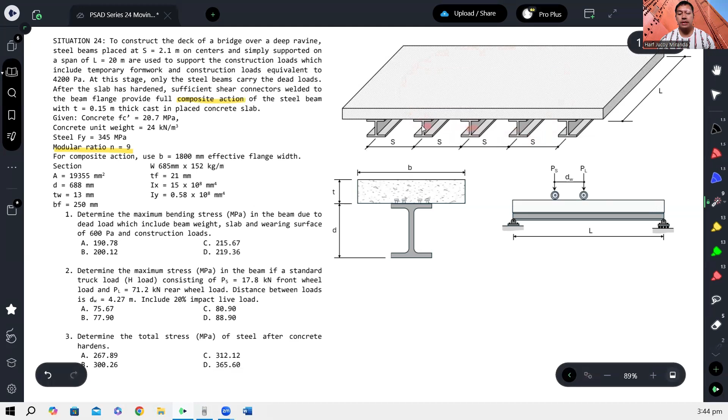Just to explain the figure, this is our isometric view. These are the steel beams referred to in the problem. Their spacing is 2.1 meters, so let's mark that: 2.1 meters here, here, and so on. And then our span is 20 meters.

Number 1: determine the maximum bending stress in the beam due to the dead load, which includes the beam weight, slab, and a wearing surface of 600 pascals, plus the construction loads. So basically we need to find the maximum moment in the steel beam due to the dead load.

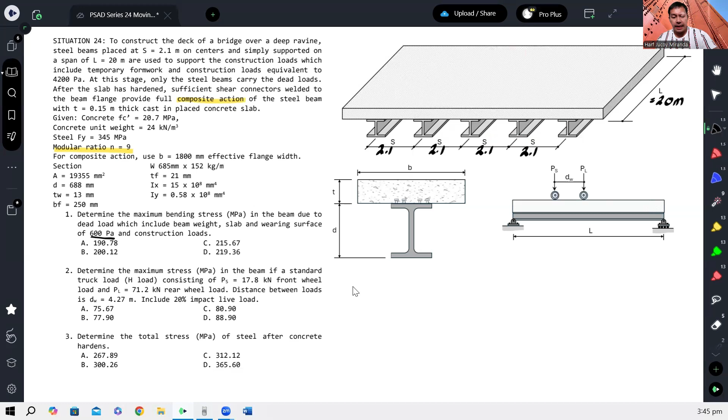So let's summarize all the dead loads. First, beam weight. The weight of the beam is given as 152 kilogram per meter. So we have the self-weight, which we'll call 152 kilogram.

Let's convert that to kilonewton per meter. Multiply by 9.81, divide by 1,000. So 152 times 9.81 over 1,000, and that gives us 1.49 kilonewton per meter. That is the beam self-weight.

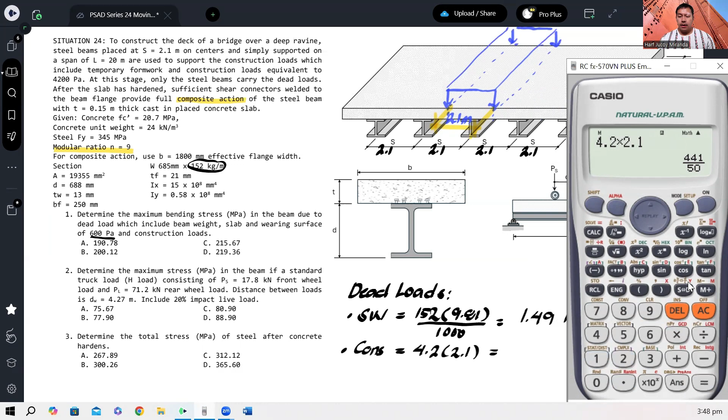So all the load there, with a tributary width equal to 2.1 meters. To convert the construction load from pressure into kilonewton per meter, we just multiply it by the 2.1 tributary width. So 4.2 times 2.1 gives us 8.82 kilonewton per meter. What else?

There's also the wearing surface given in the problem. Same idea, it's in pascal, so to convert to kilonewton per meter, first convert to kilopascal: 0.6 kilopascal, then multiply by the tributary width of 2.1. That gives us 1.26 kilonewton per meter.

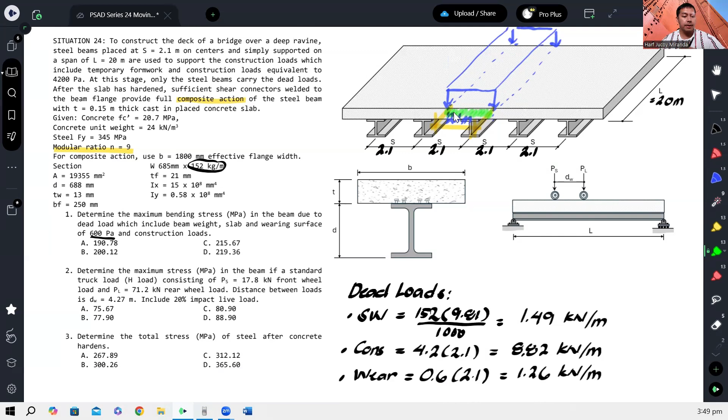Finally, don't forget the slab, our concrete slab. Of course there's also the weight of this slab. As we can see, we're given the unit weight of concrete, so to convert that to kilonewton per meter, we just multiply it by the cross-sectional area of the concrete. That cross-sectional area has a width of 2.1 meters and a thickness of 0.15, as stated in the problem, giving us kilonewton per meter.

So that is 24 times 2.1 times 0.15, which gives us 7.56.

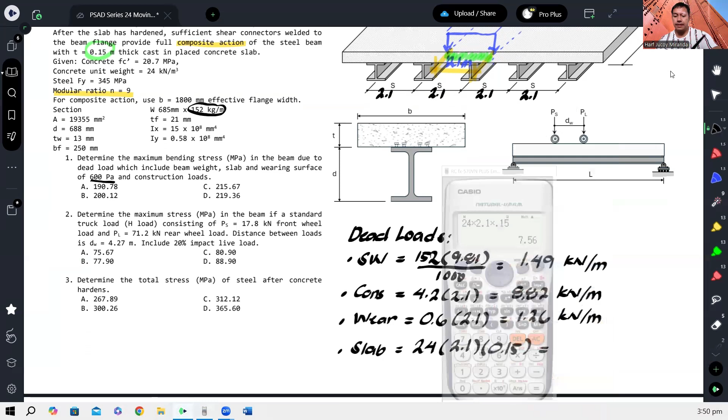Okay, and I think that's all, no? Importante lang, wala tayong makalimutan dito. So sinabi niya, beam weight, okay na. Slab, okay na. Wearing surface, okay na. Pati yung construction load, ito rin. Ito naman yun. Okay na lang.

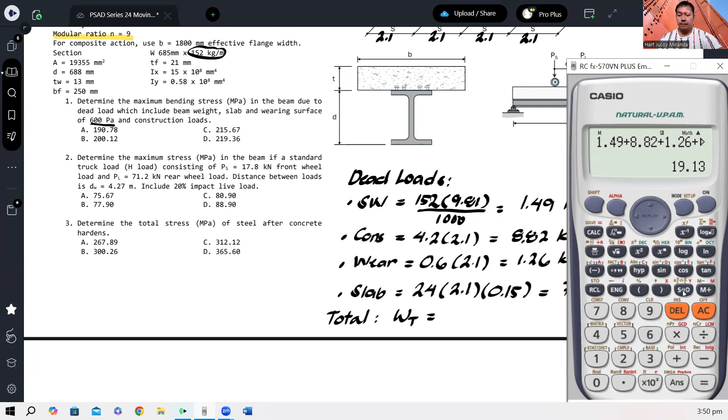So, ibig sabihin, yung total dead load natin, tawagin ko na W sub T, total. So, i-add lang natin yan lahat: 1.49 plus 8.82 plus 1.26 plus 7.56. And that should give us 19.13 kilonewton per meter.

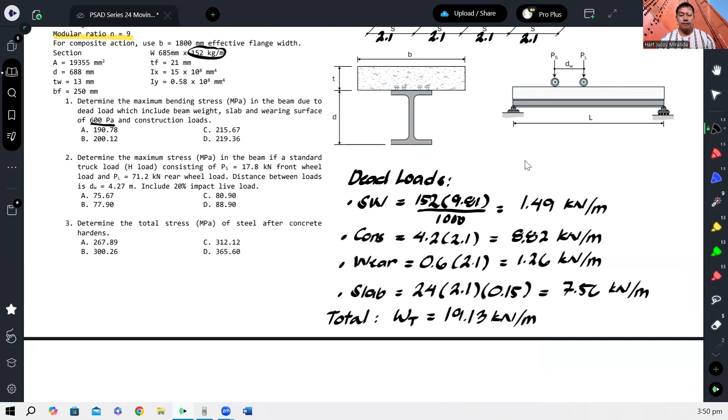Okay? So, therefore, now that we have the load, parang ang lalabas na ngayon, para lang siyang simply supported beam, no? So, this is for number 1.

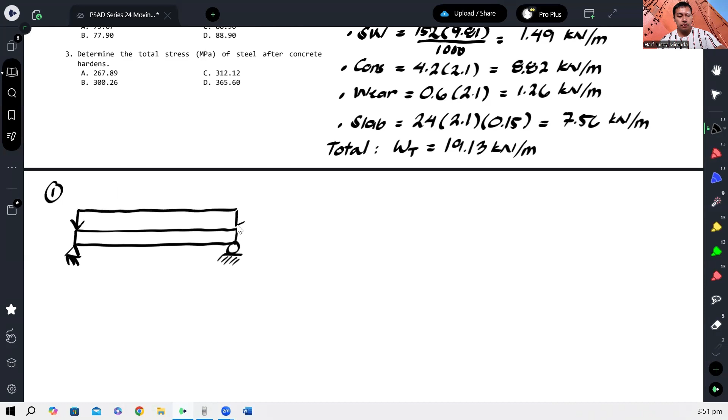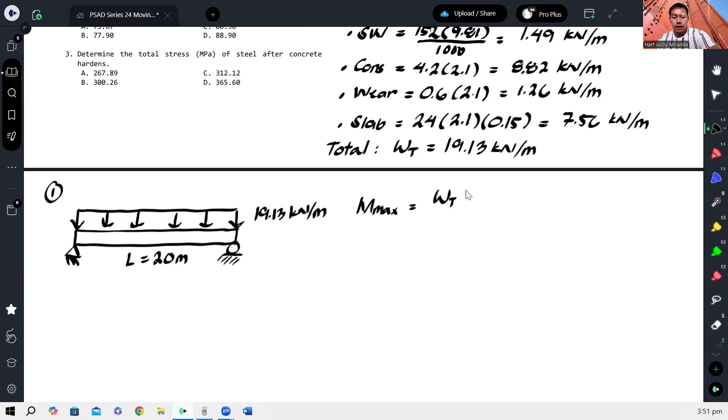Para lang siyang simply supported beam, okay, na subject to a uniform load equal to the calculated, which is 19.13 kilonewton per meter. And therefore, ang maximum moment na mapoproduce dyan, which is at the midspan, would simply be equal to W L squared over 8.

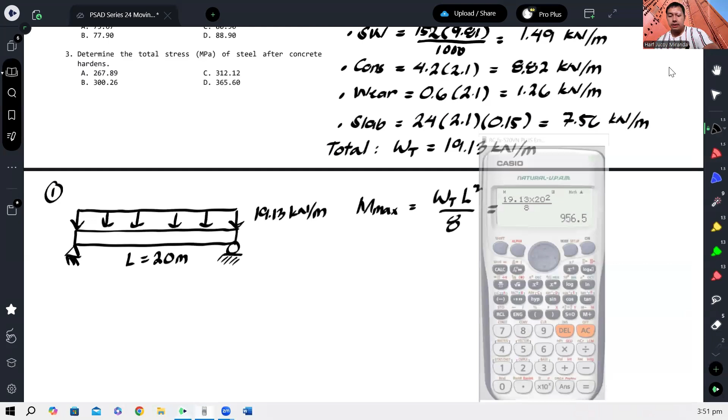Okay, at pwede na natin actually makompute. So that's 19.13 times 20 squared over 8. And that gives us 956.5 kilonewton meters. Okay? And dahil meron na tayo noon, we can now calculate the maximum bending stress.

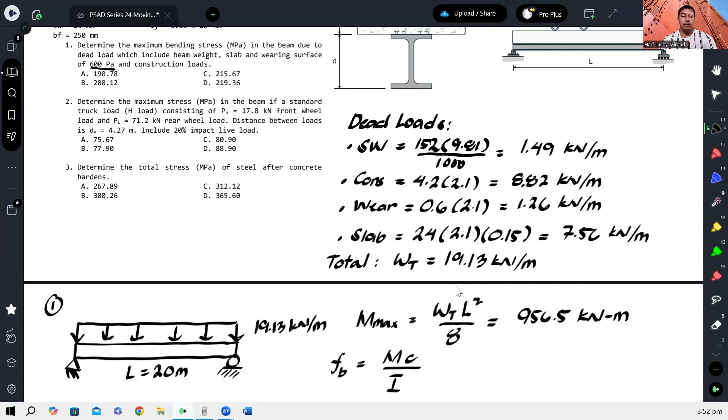And that is just MC over I. Okay? At dahil dito sa number 1, wala pang composite action na mangyayari kasi ibig sabihin dito hindi pa fully cured yung concrete, no? So yung bakal lang natin yung magdadala ng load na yon. So ang gagamitin lang muna natin na moment of inertia would be yung moment of inertia nung bakal o nung steel cross section nung structural steel, na kung saan equal sa 15 times 10 to the 8, which is yun yung moment of inertia about the x-axis.

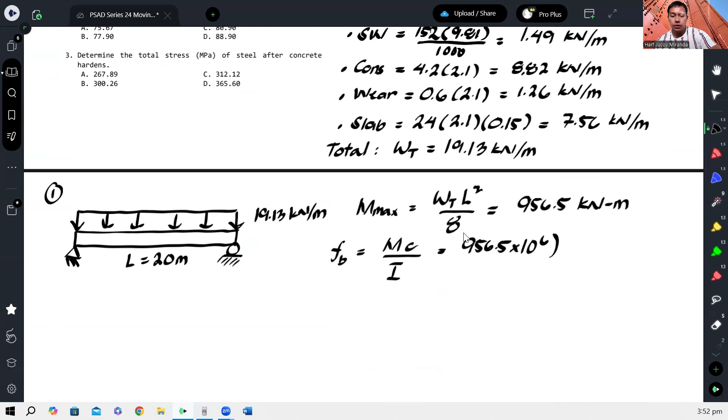So we have 956.5 times 10 to the 6, gawin natin Newton millimeter. Tapos yung C natin, so di ba ang cross-section natin dyan ay ganito. Ayan, so ito yung x-axis, na lumalabas, yan na rin yung neutral axis natin for this case.

So, as we can see, yung C natin is yung distance natin from the extreme fiber. And actually, pantay lang naman yan kasi doubly symmetric naman tong natin, I shape. So, ibig sabihin, kung ang total depth nito ay 688 as given in the problem, yung C natin bali would be kalahati nun, which is 344. Okay? So, 344 over the moment of inertia about the x-axis, which is 15 times 10 to the 8.

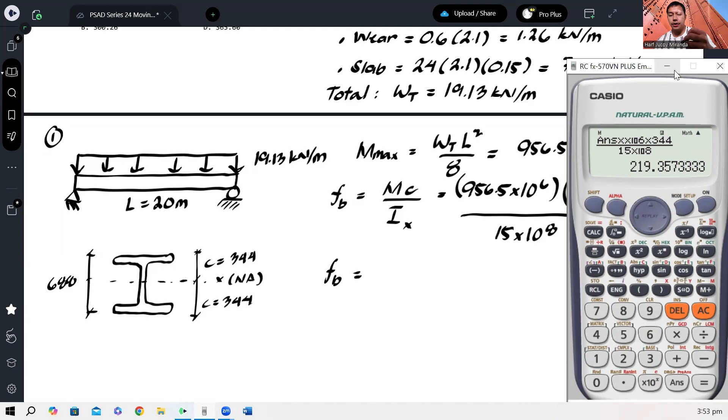Okay, and our maximum bending stress due to dead load. Okay, this gives us 219.36 megapascals. Okay, and that will be our answer for number 1.

Okay, next, determine the maximum stress in the beam if a standard truck load, highway load, consisting of PS equals 17.8 kilonewton front wheel load and PL equals 71.2 kilonewton rear wheel load. Distance between loads is 4.27 meters, include 20% impact live load.

Okay, so pinapahanap naman yung maximum stress. So dito, kailangan tandaan natin na kapag ka meron kang moving load, in order for you to produce the maximum moment, kailangan daw, ito ay pang dalawang wheel ha, kailangan daw yung gitna ng beam, yung gitna ng beam o yung center line ng beam ay papagitnaan nung maximum na wheel load at yung resultant ng mga wheel, no?

So what do I mean pagdating sa drawing? Drawing natin. So ganito daw mapoproduce yung maximum moment natin. Okay, so kunyari ito yung gitna. No, yan yung center line natin.

So kailangan, ito yung requirement ha, kailangan yung pinakamabigat na wheel, ito yun, larger PL. Tapos yung resultant ng mga load, tawagin ko na lang na R, ay kailangan daw equidistant doon sa center line. So kung ito ay X, ito rin ay X. Tapos kunwari nandito somewhere yung smaller na load. Ganyan, no? Yan yung itsura. Ganyan dapat yung tandaan natin. Tapos dito natin matatagpuan yung maximum moment.

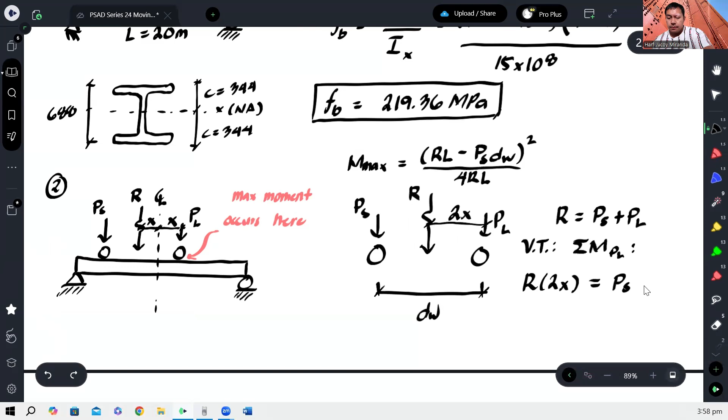So when we apply Varignon's theorem, let's take moment about the larger load. The total, which is R, times 2x, would be equal to the smaller force times the distance of the wheels. This gives us x equal to the smaller load times the distance of the wheels, over the resultant R.

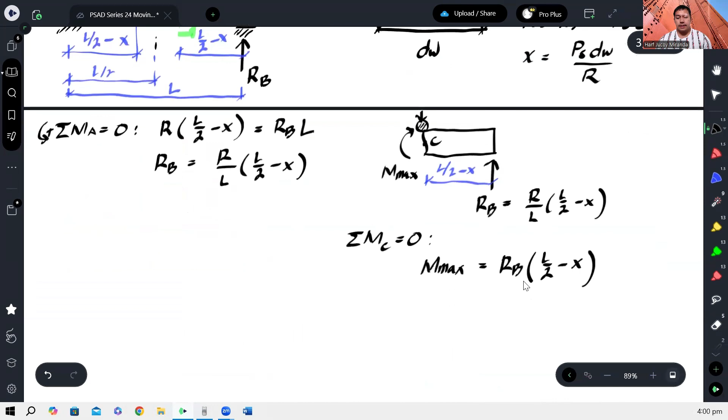In case I forget this formula, let's just show if this is really the formula. RB is R over L times L over 2 minus X, then let's multiply this by L over 2 minus X again. As you can see, we can simplify. Let's continue here. So M maximum can be rewritten as R over L times, L over 2 minus X, squared.

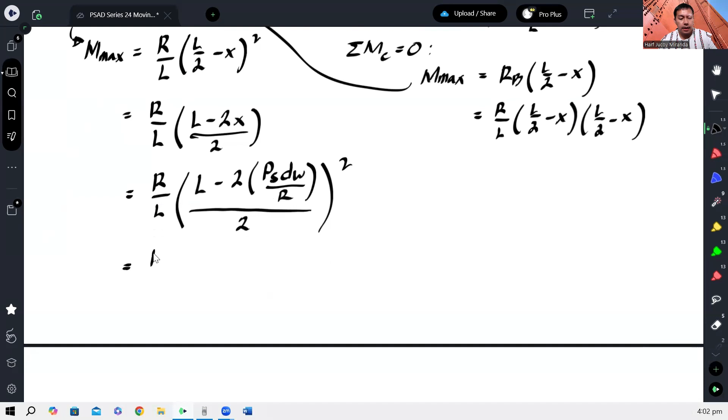Okay, and since there's a denominator with R, let's get a common denominator. So it becomes R over L times, RL minus 2 PS DW, over 2R.

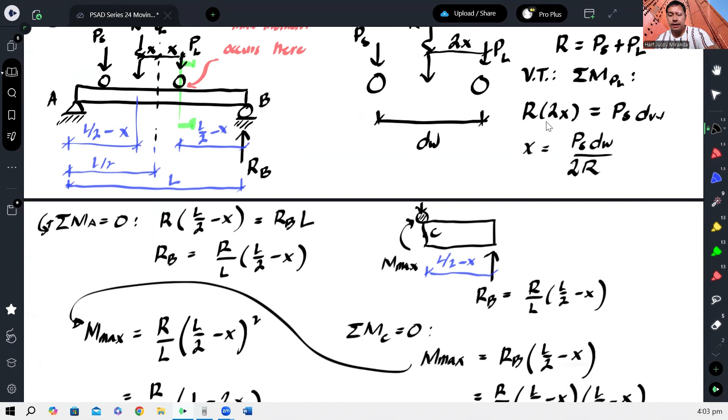Okay, ayan. So naka-square ito lahat. Kapag sinimplify pa natin yan, magiging R over L. Itong nasa numerator side, iiwan na lang natin as naka-square. Yung denominator side, 2r squared is just 4r squared. So magka-cancel yung isang r, sasama dun yung L, kaya ang lalabas dito, yung maximum moment natin is RL minus PSDW squared over 4RL, which is ito rin yung kanina natin na sinulat. Okay, ito rin yun, no? Okay, so that's how we derive it.

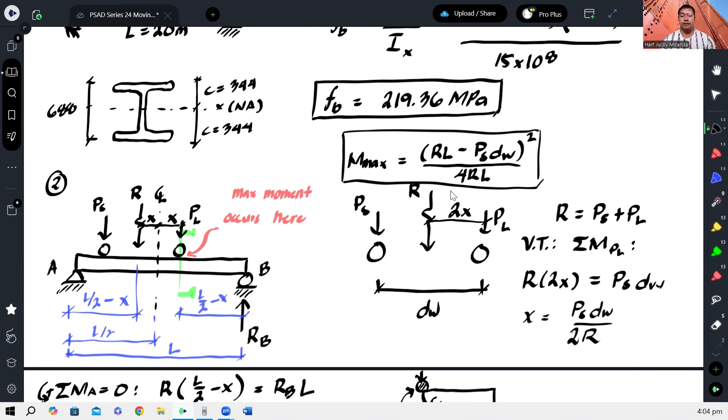Pero kung gusto ninyo kabisaduhin, pwede naman. Mas madali kung kabisado. So anyway, kung gagamitin natin ito, so we can now calculate the maximum moment.

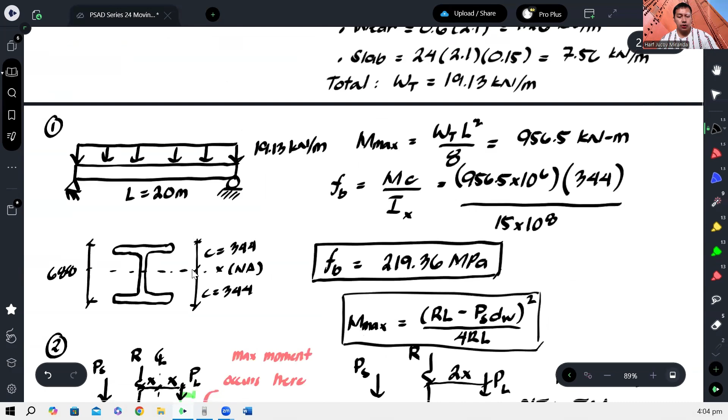So sa problem, binigyan tayo na yung PL ay 71.2. Tapos yung P smaller is 17.8. Tapos yung distance ng mga wheels ay 4.27. Ayan, so we'll just apply them.

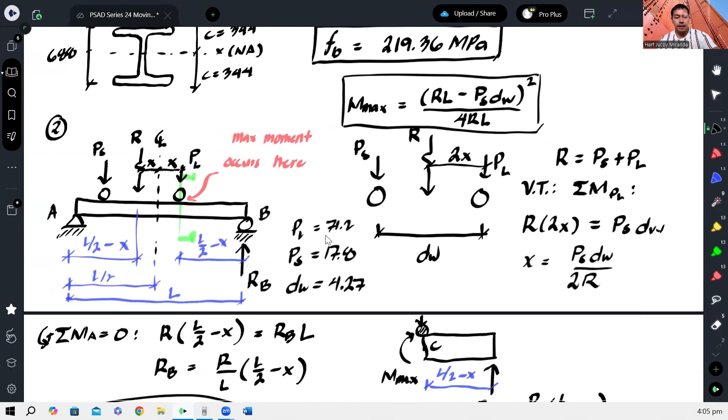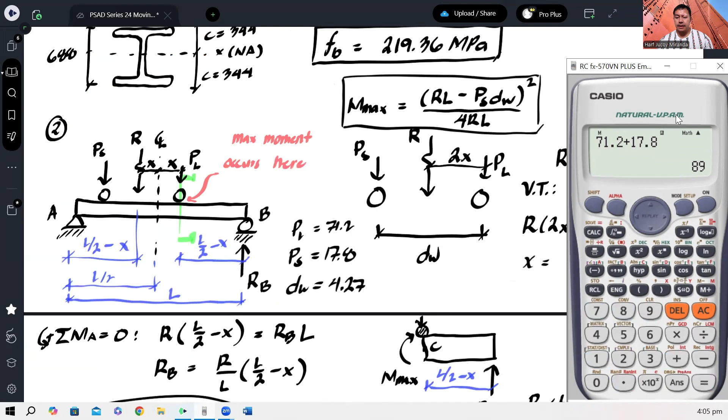So lumalabas yan kapag itong dalawa, so we can calculate for the R dito na lang sa baba. Yung R ay P smaller plus P larger. That would give us 71.2, tama ba? Plus 17.8, so that gives us 89 kilonewtons.

Okay, so if we would use that formula, magiging 89 times yung L natin 20 minus yung smaller na wheel load, 17.8 times yung distance between them is 4.27, naka-square over 4RL. Okay, and that gives us our maximum moment, 407.81 kilonewton meters. Okay, and now that we have that, we can now calculate our moment of inertia.

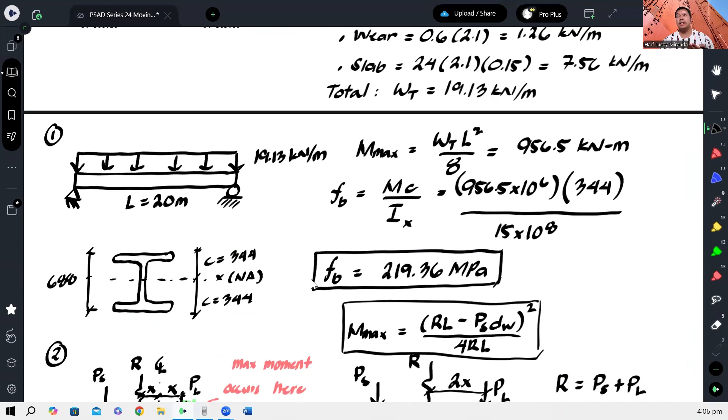I mean, our bending stress. However, we still need to calculate for our moment of inertia.

Sa number 2 kasi, although wala siyang binanggit specifically, dahil meron nang dumaan na sasakyan, it is logical to assume or to conclude na nag-cure na yung concrete. Diba? Hindi naman magpapadaan yung sasakyan kung hindi pa nag-cure yung concrete. At dahil nag-cure na yung concrete, i-consider na natin dito ngayon yung composite action.

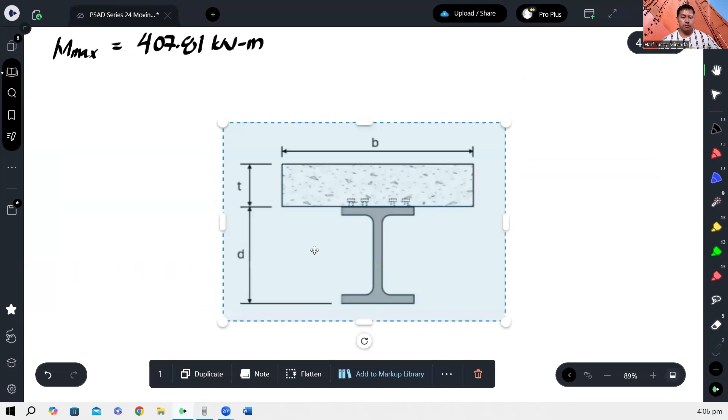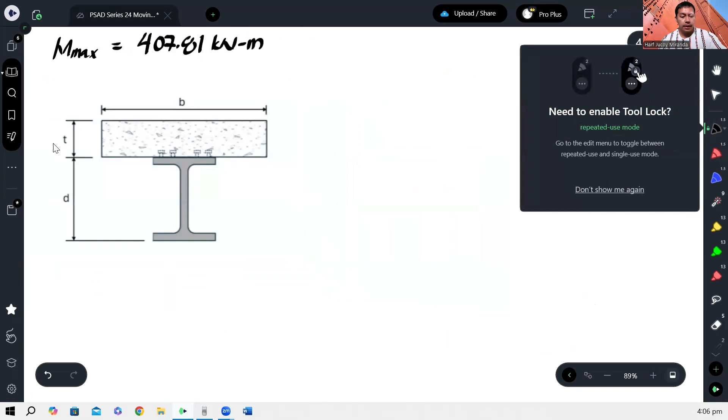Okay, so ibig sabihin, meron tayo ngayong section na kung saan magkatulong itong dalawa. Lagyan natin ng dimensions. Ito ay 150 mm, ito ay 688. Tapos ito naman yung sinasabi niya na effective flange width na 1,800. Kaya lang, ito, concrete.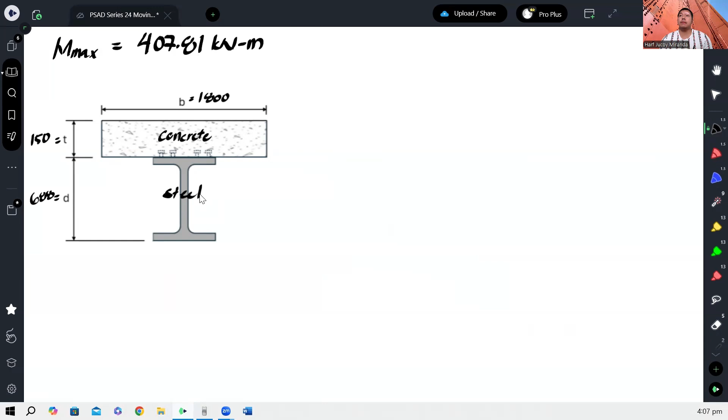Ito, steel. Alam naman natin na yung formula na MC over I, yung bending stress formula, ang isa sa mga assumptions sa derivation nun is kailangan yung material mo homogeneous. Or ibig sabihin, yung material mo iisa lang. So ano ang gagawin para maging mapag-isa itong dalawang magkaibang materials na to?

So dito ngayon papasok yung tinatawag natin na transform section. Ita-transform natin siya to single material. Okay, so paano yon? So ganito yan.

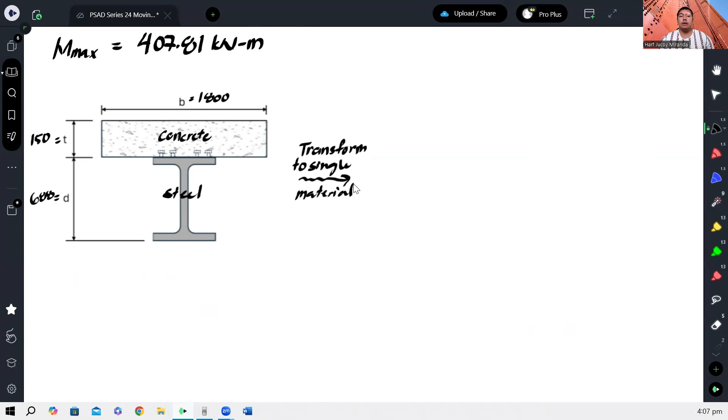You can choose if you want to convert everything in concrete or you can also convert everything into steel. Now depende yan sa case, depende sa kung ano yung mas madali. Um, to convert, yung modular ratio natin, ito na lang siguro. Konting background lang. Yung modular ratio, ano yan eh? Modulus of elasticity nung stronger na material sa modulus of elasticity nung weaker na material. Palagi yon. Kaya nga yung modular ratio natin laging mas malaki sa 1.

Ngayon, kung iisipin natin, how does it reflect in terms of the geometry? No? So tingnan natin. Diba, yung modular ratio, I mean yung modulus of elasticity, ano yan? Slope yan ng stress strain curve, diba? So nasa y-axis yung stress, nasa x-axis yung strain. So ibig sabihin, ito yung stress divided by strain.

Okay, so ibig sabihin, kapag sinubshoot natin ito dito, mangyayari, this would be stress over strain nung strong material over, ito naman yung stress over strain nung weaker material.

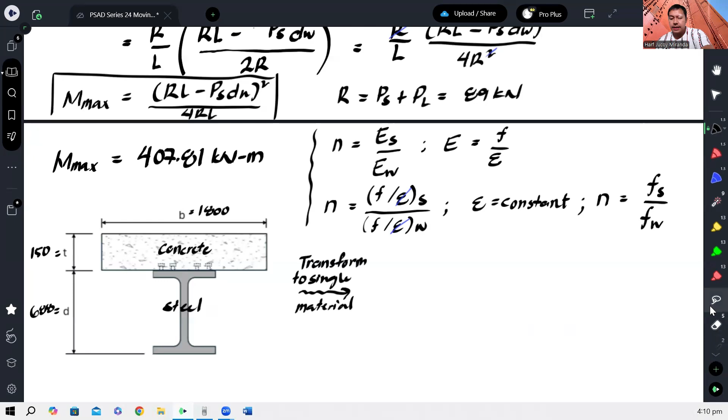We also need to identify that, hindi ba, yung nasa taas, pag sinabi mong stress, equal lang yun sa force divided by area? So ibig sabihin, mula dito, we can also write na yung modular ratio is force divided by area nung stronger material over force divided by area nung weaker material.

Tapos dito naman, kung meron kang material na kahit magkaiba pa yan, pag meron kang in-apply na force dyan, kailangan hindi magbabago. So dito naman, kailangan yung force natin must be constant. So ibig sabihin, this will cancel out.

And we are left with modular ratio equal to 1 over area ng strong over 1 over area ng weak, or that is also equal to the area of the weak divided by area of the strong. Okay? So yan ngayon yung mga relationship natin. So how do I use that?

So bali bilugan ko ha, ito, tsaka to. So how do I use those? Specifically speaking, sa problem na to, ang gagamitin natin dito is itong geometry, itong green, na kung saan sinasabi niyan, dito na lang natin ilagay, sinasabi niya na yung ratio ng area ng weaker sa area ng stronger ay equal lang din sa modular ratio.

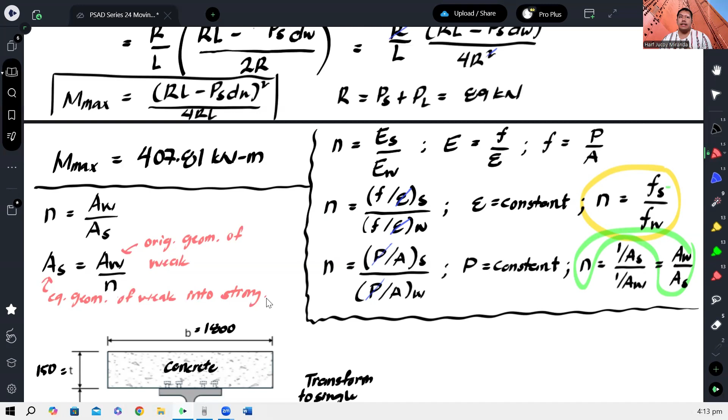of a strong material, no, ibahin natin. Para malaman ko kung ano yung equivalent size netong mahinang material na to kapag kinonvert ko siya sa matibay na material, kailangan lumiit siya. Kumbaga, ang equivalent niya na size doon sa stronger material mas maliit. Bakit mas maliit? Kasi originally mas mahina siya. So ibig sabihin, kung magiging malakas siya na material, kailangan paliitin mo yung area para makuha mo yung same capacity. Okay? So hopefully that makes sense.

Kaya ito yung pinapakita nito. Ibig sabihin, para maging strong material yung weak material, i-divide mo ng modular ratio yung area niya. And vice versa, kung halimbawa naman na yung strong material gusto mong gawing weak material, na gusto mong pahinain, kailangan mo naman i-multiply ito. Kailangan mo naman siyang i-multiply para makuha mo yung equivalent na weak material niya. So ibig sabihin, yung originally matibay na material, para maging mahinang material siya, kailangan lumaki siya. Para maging yung capacity niya ay same pa din.

Okay, I hope that makes sense. But anyway, in short, dito, yung concrete, kung gusto kong gawing steel, kailangan kong i-divide yung area ng modular ratio. Tapos yung steel, kung gusto kong maging concrete siya, kailangan ko naman siya i-multiply ng modular ratio. Kaya nga sabi ko kanina, mamimili ka lang kung anong gusto mo. So dito, mas convenient, based on experience, na yung concrete na lang yung gagawin nating steel.

So ibig sabihin, yung mahinang concrete para maging steel, i-divide natin ng modular ratio yung isa sa mga dimension niya. Take note, isa lang sa mga dimension ha, hindi yung dalawa, kasi isang n lang yan. Kasi 'di ba kung halimbawa na ito ay base times height divided by n.

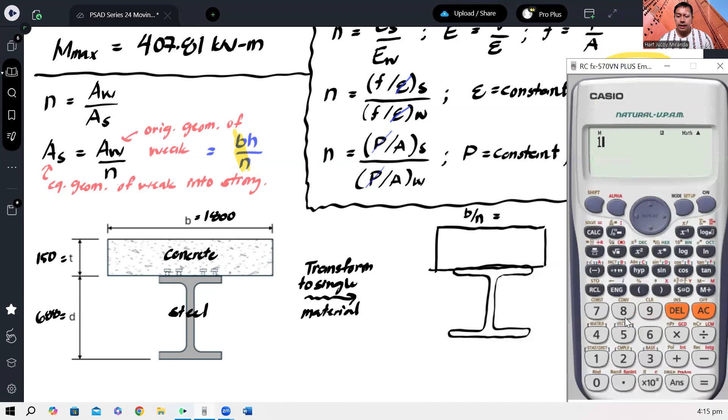Ayan, okay? So yung transform section niyan, magiging ganito ang itsura. Walang magbabago sa steel cross-section dahil hindi natin siya i-convert. Ang i-convert natin bali is yung concrete section. Ayan, so as you can see, liliit na to, kasi magiging ano na to, B divided by N. So ano yun? 1,800 divided by modular ratio na 9, which is 200.

Okay, tapos ito, 150 pa rin, walang magbabago. Tapos ito, 680 pa rin. So ito na ngayon yung equivalent steel nung concrete. Okay, ibig sabihin, steel na lahat to, steel na sila lahat. Yun yung idea, na para maging isang section lang siya, or isang klaseng material lang siya.

So of course, because same material na sila, pwede na natin hanapin ngayon kung nasaan yung neutral axis niyan. So bali, mag-Varignon's theorem tayo. Dito na lang ako sa baba magrerefer. So we will apply Varignon's theorem

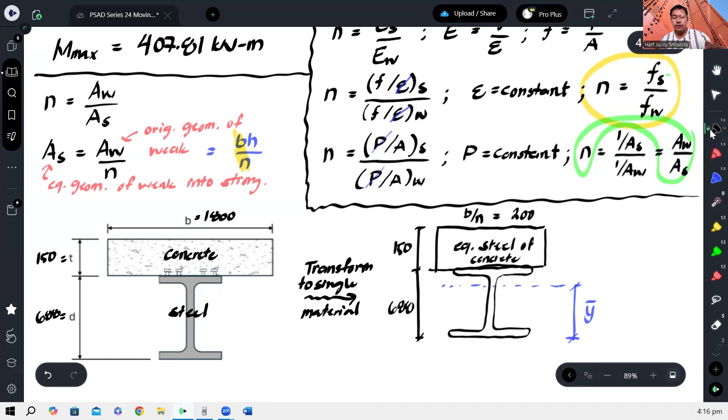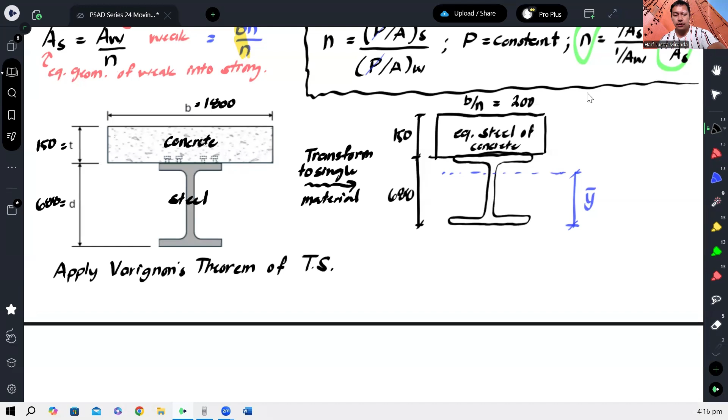on the transform section. So ito yung transform section natin. So summation ng moment sa bottom tayo, moment of area sa bottom. So yung total area, tawagin ko na lang ito na area 1, ito tawagin natin na area 2.

So yung total area, which is area 1 plus area 2, times y bar, would be equal to area 1, ang moment arm nun from the bottom ay 680 plus 150 over 2, plus yung area 2, which is yung steel, ang moment arm nun is just 680 over 2. So from here, we should be able to calculate for y bar.

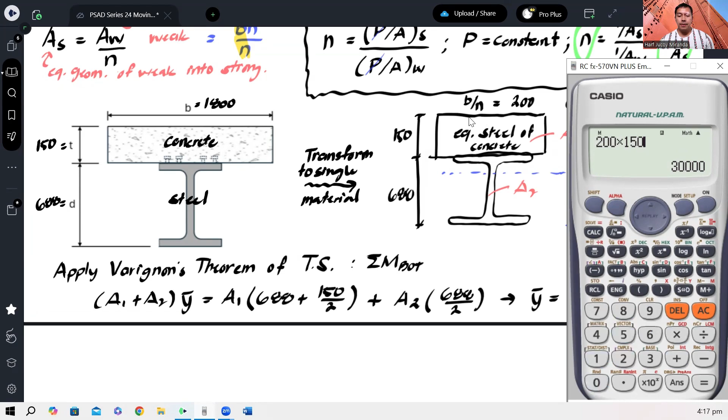So diretsuhin ko na. Pag sinolve yung y bar, lagi ko na lang sa A yung A1: 688 plus 150 over 2, plus, lagi ko sa B yung area 2: 688 over 2, divided by area 1 plus area 2. At area 1 is now 200 by 150 as you can see in the drawing, so yung base mo 200, yung height mo 150. At yung area 2 is of course yung binigay na area, 19,355. So ito na yun, ito ngayon yung Y bar natin.

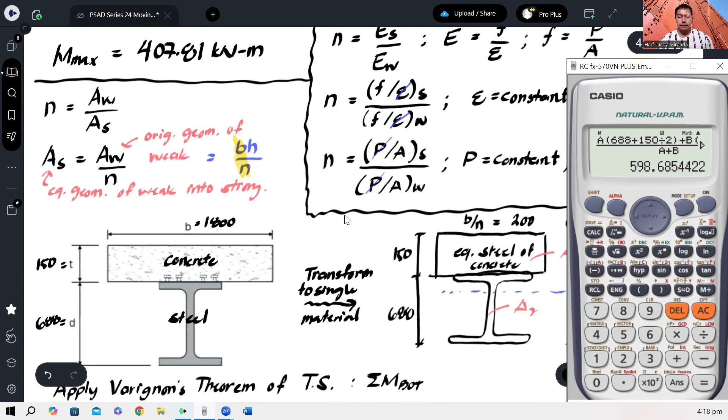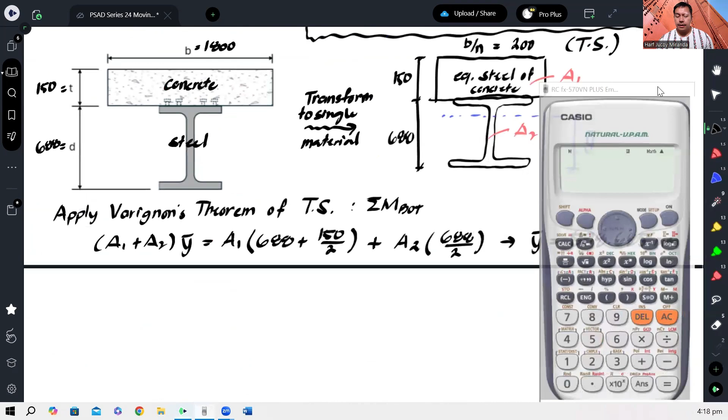598.685 or 685 millimeters. Store natin to sa Y. Okay, so next, alam na natin kung nasaan yung neutral axis netong composite section, so we can now

we will now need to solve for the moment of inertia. So yung moment of inertia nung transform na concrete, so BH cube over 12 kasi rectangle. Ay sorry, yung B pala 200.

So 200, 150 cube over 12, plus yung area na yon, tawagin ko area 1, tapos distance. So yung distance ng centroid nito papunta sa neutral axis, bali 688 plus kalahati ng 150, minus yung y bar. At don't forget squared.

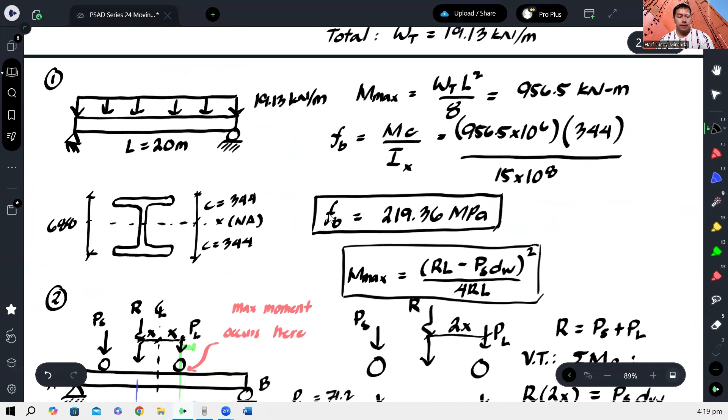Plus yung moment of inertia naman nung I section, given yun, 15 times 10 to the 8, plus AD squared, so area 2 times yung distance nilang dalawa.

So yung centroid naman nito is somewhere here, so yung distance nilang dalawa, bali ito, which is kalahati ng, sorry, ito pala, kalahati ng 688, iba-minus natin sa y bar.

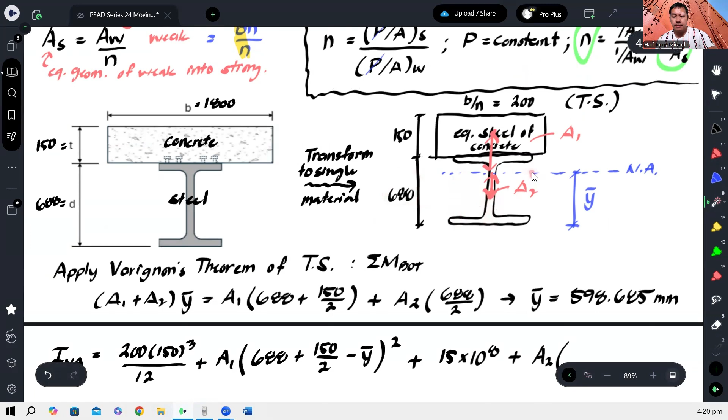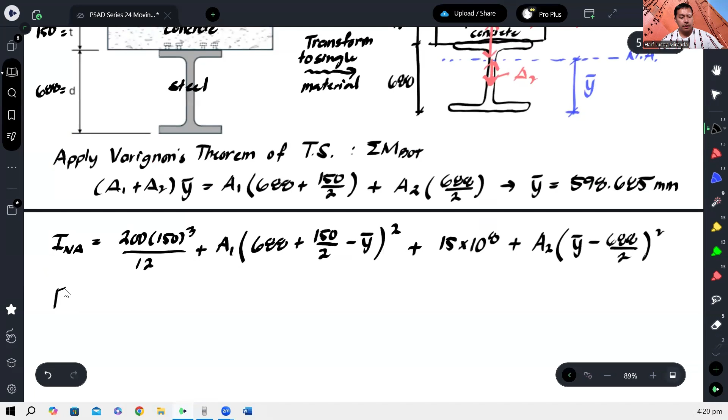Okay, and that should give us our moment of inertia of the transform section. So 200 times 150 cube over 12, plus area 1 times 688 plus 150 over 2 minus y bar, plus 15 times 10 to the 8 plus area 2 times y bar minus 688 over 2, squared.

Okay, and that gives us 3621.68, times 10 to the 6 millimeters to the fourth. So store natin sa calculator, sa M na lang.

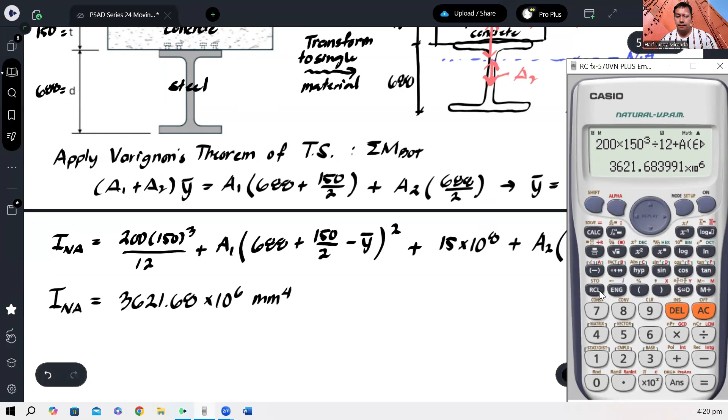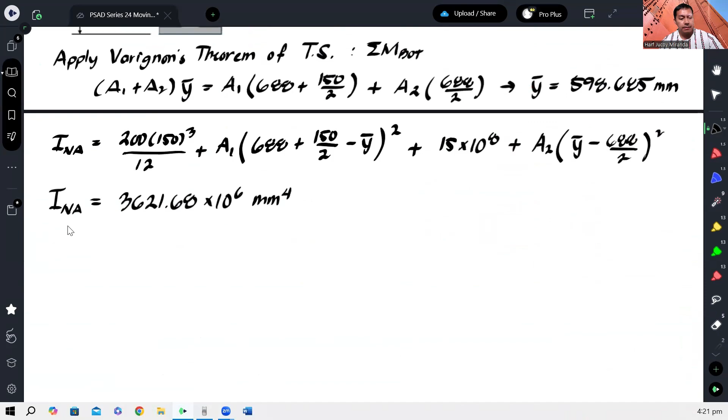So now that we have that, we can now define now the maximum stress in the beam. Nasa ang bending stress sa beam, number 2. Okay, so the maximum bending stress on the beam, ganun pa rin, MC over I.

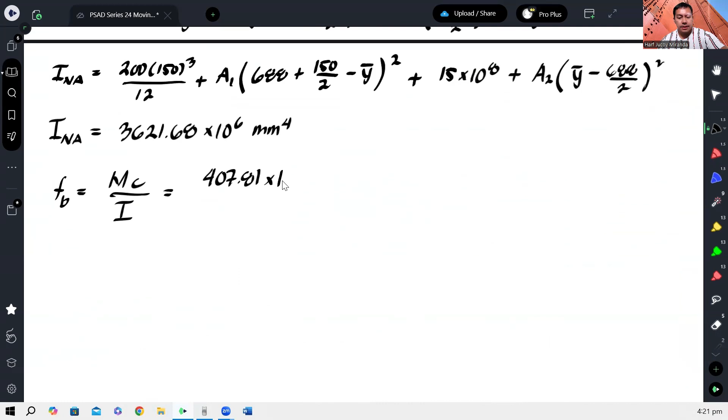Yung M natin, yung na-compute natin kanina, 407.81, times 10 to the 6 para maging Newton millimeter. Tapos yung C, ano yung C? So actually dito, meron tayong dalawang pwedeng ikunin, pwedeng itong fiber na to o itong fiber na to. At pinagkaiba lang, yung fiber sa ibabaw will be under compression while yung fiber sa ilalim will be under tension, because the bending is positive.

However, wala namang binanggit specifically kung anong klaseng stress, so ibig sabihin yung pinakamalaki lang, pinakamalaki meaning malaking C dapat. So kung ito yung neutral axis, kanina na-compute natin na ito ay 598.685, so lumalabas itong kabila will be 688 minus Y bar, which is smaller, so 89.31 lang. Ibig sabihin mag-govern itong nasa bottom.

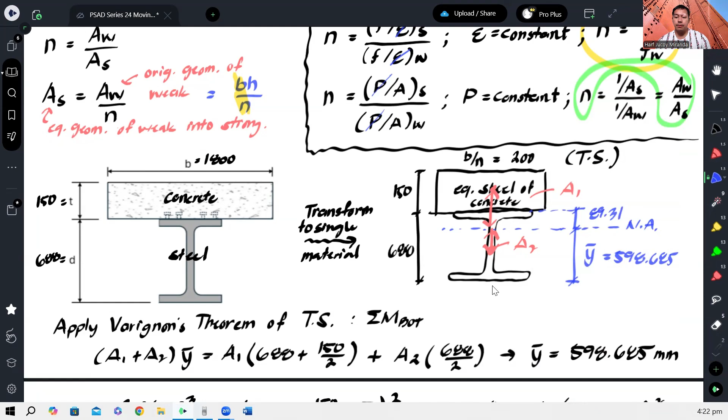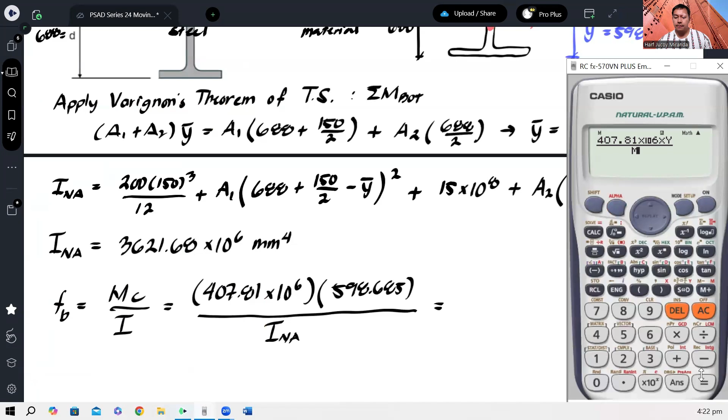Mas stress itong nasa ilalim. So therefore, ano tayo? 598.685 over yung I, hindi ko na susulat. And this gives us our bending stress: 407.81 times 10 to the 6, times yung Y bar natin, over moment of inertia. So that gives us 67.41 megapascals, okay?

Okay, meron ako na miss out, no? May binanggit pala dito na include 20% impact live load. So ibig sabihin, itong mga live load na to, kailangan pa natin i-increase ng 20%.

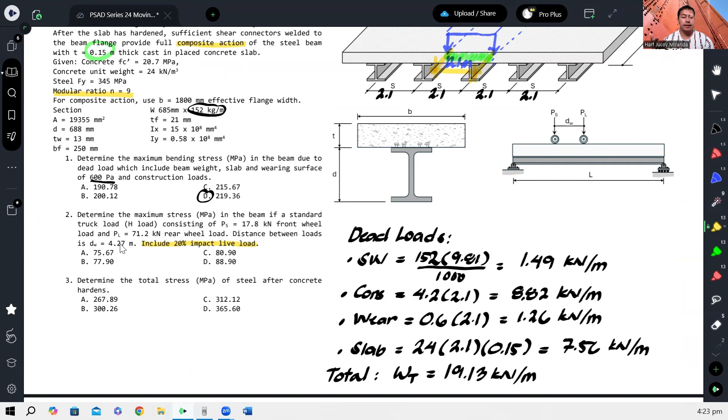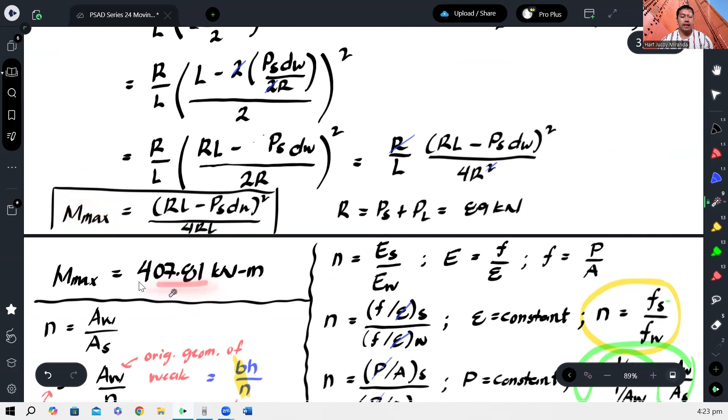Well, actually, no problem, kahit na na-solve na natin ito lahat. Kasi kung titignan nyo yung mga formula, yung moment is proportional talaga siya dun sa mga live load, yung R. So ibig sabihin, pwede na lang na kanina, ito, mumultiply na lang ito ng 1.2. At ganun din yung stress na na-compute natin. Kasi dito lang yan, yun. Pag nakamultiply ito ng 1.2, mumultiply din natin ito ng 1.2. So lagay ko na lang dito, no?

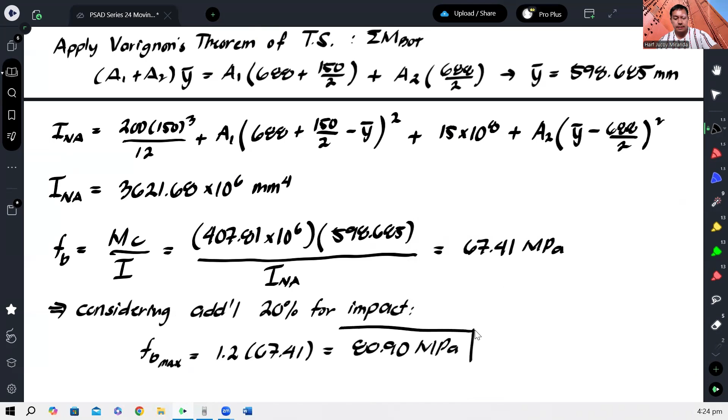Considering additional 20% for impact. Okay, so yung magiging maximum stress natin would be 1.2 nitong na-compute natin na 67.41. So multiply natin ng 1.2. So that gives us 80.90 megapascals. And that would be our answer.

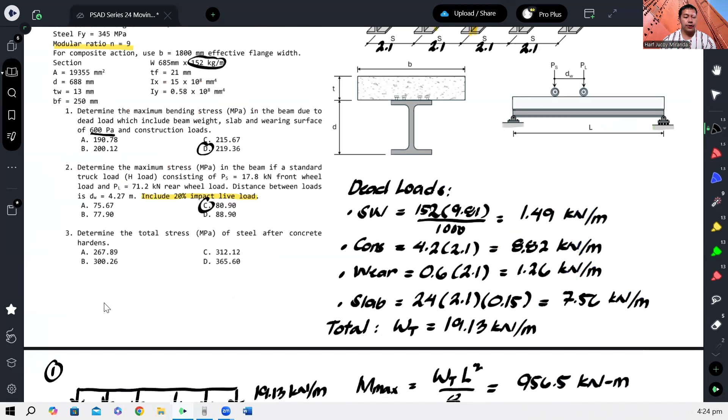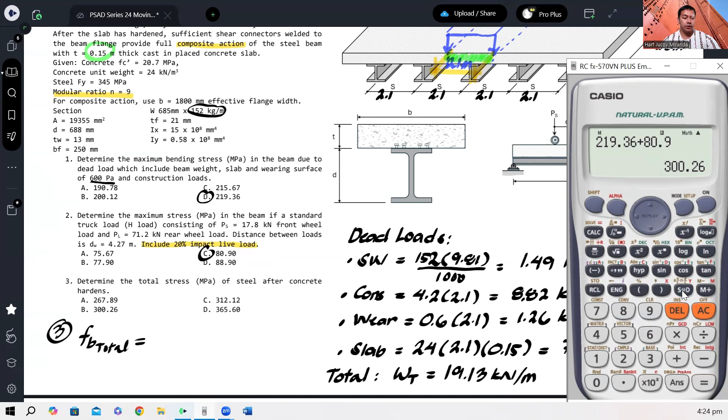Okay, 80.9. Alright? And then for the last question, for number 3, ito madali na ito. Determine the total stress. Bali dito, the total stress will just be the sum nung sagot natin sa unang dalawa. So kapag in-add natin yung 219.36 and yung 80.9, we should get 300.26, which is letter B. Okay? And that gives us the total stress.

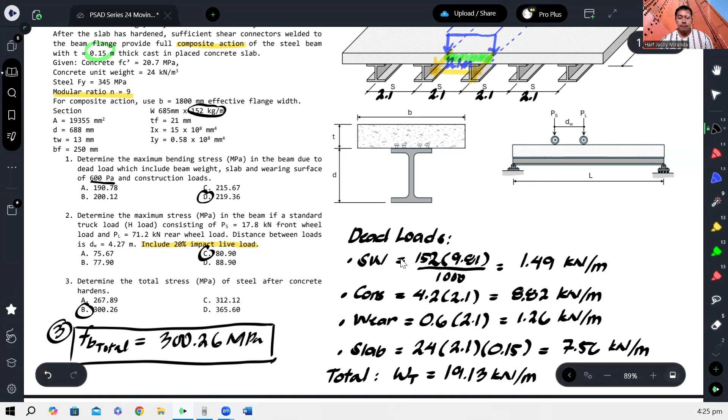O baga, yung total stress, before nag-harden yung concrete, and then yung stress, or plus stress due to the live load na moving two-wheel load. Okay? Now, in addition to that, so although tapos na naman yun, gusto ko lang emphasize na kapag halimbawa, na di ba ito yung transformed section natin from earlier. Ito yung transformed section kunwari natin.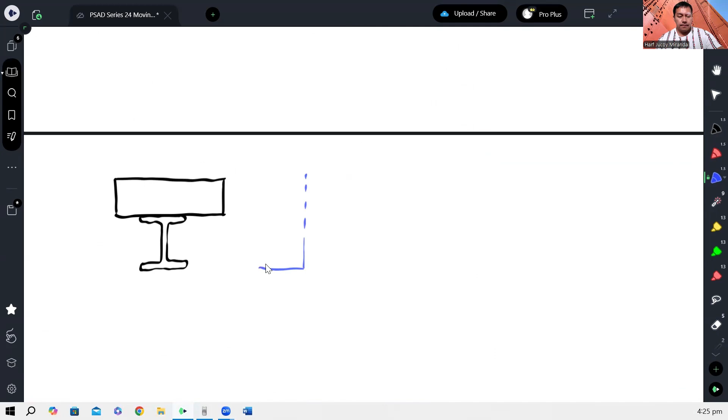Okay? Kapag dinrawing natin yung stress diagram, okay? So ito ngayon yung na-compute natin na stress dito, tension sa ilalim, no? Okay, ang value ng stress na is 80.9. Okay? Tapos kung gusto mong computein yung stress dito sa ibabaw, no? Kasi ang neutral axis natin somewhere dito eh. Okay? So ganito kasi magiging itsura ng ano natin, stress diagram.

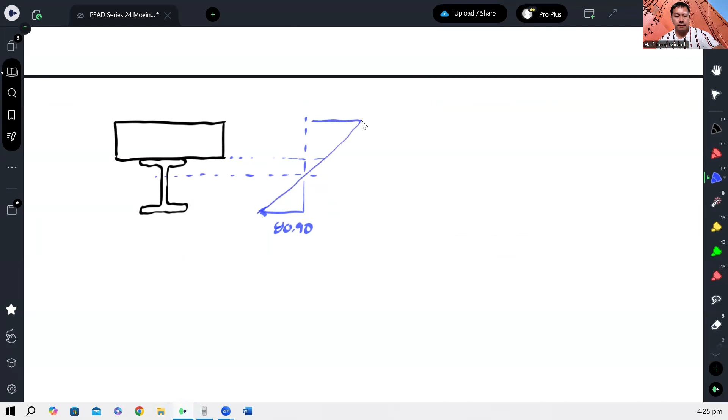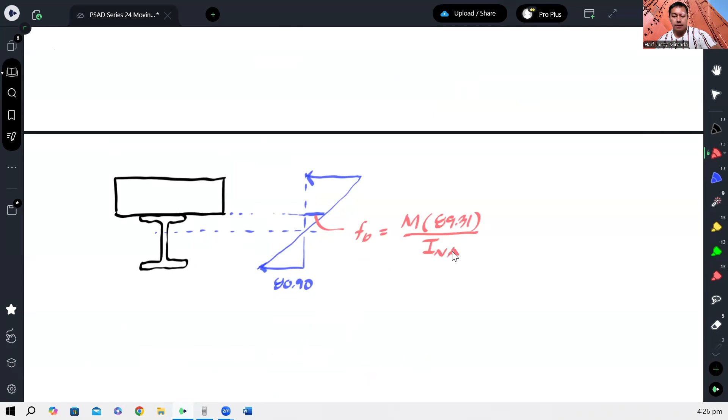Okay? So kung gusto mong kumpitin yung stress sa ibabaw ng concrete, that will sa ibabaw ng steel, that will just be equal to M. Yung C mo is yung 89, ay 89.31 over I. Okay? Tapos kung gusto mo naman kumpitin yung stress dito, pwede rin, no? Yung M tapos yung distance na to, which is additional 150. Diba ito ay 150. Okay, so that's 89.31 plus 150 over I.

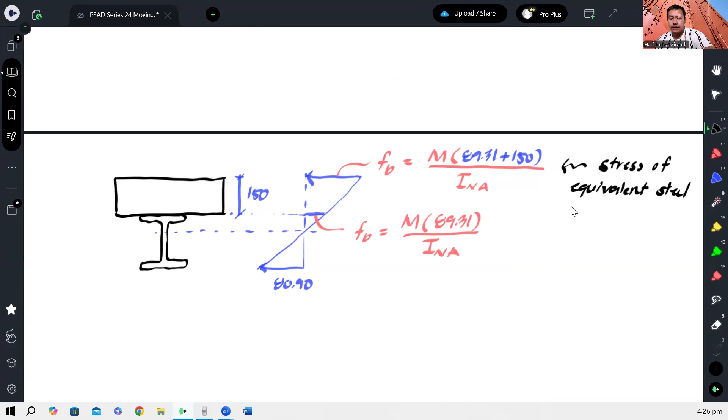Ayan. Okay? However, itong makukompute mo dito is the stress of equivalent steel, no? Of the given concrete. So ibig sabihin, hindi yan yung totoong stress dun sa steel. I mean, sa concrete, no? Yan ay stress ng concrete kung siya ay steel. So paano mo siya ibabalik doon sa actual stress niya, no?

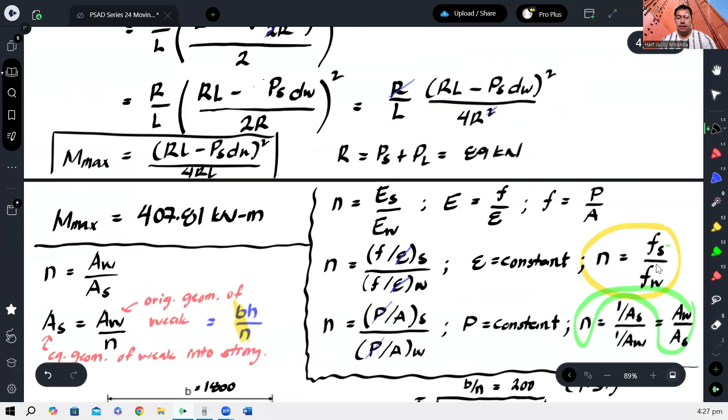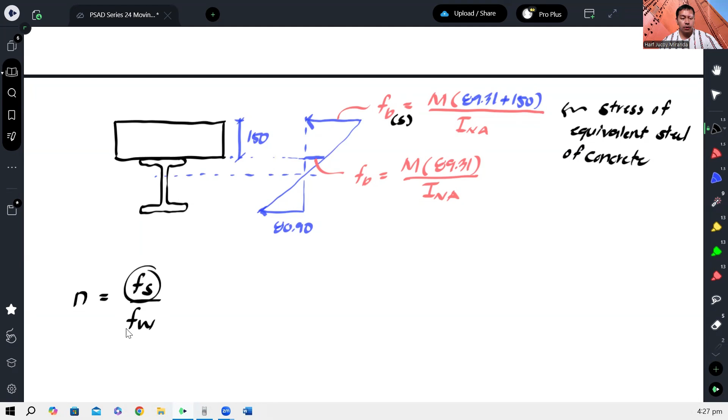So babalik tayo dito. N is equal to F of stronger over F of weaker. So N is equal to F of strong over F of weaker. So ito makakompute mo dito, ito yung stress nung siya ay strong. Kasi siya ay steel. So ito yan. No? So ibig sabihin, kung gusto mo makompute yung actual niya na stress, ito yon, which is yun yung totoo niya na material, yung weaker material.

So ibig sabihin, yung stress na weaker ay dapat equal sa, na-compute mo na equivalent stress kanina, di-divide mo pa ng N. Kaya yung actual niya na stress nung concrete is, etong nakuha natin dito, 89.31 plus 150 over INA, no? Tapos, di-divide mo pa ng modular ratio. Kaya meron pa ditong times N. So this is the actual stress of the concrete.

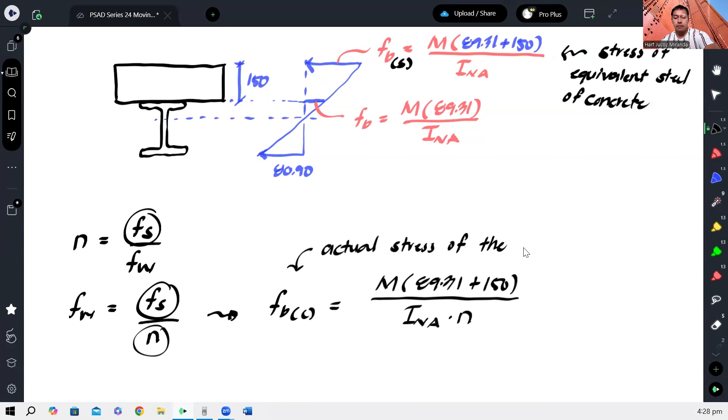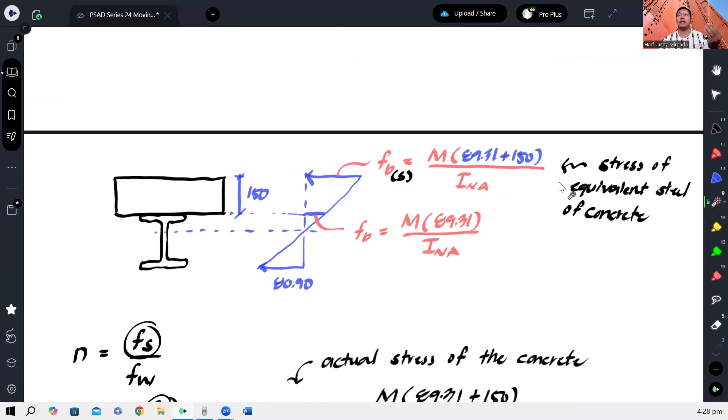Okay? So yung mako-compute mo dito is yung equivalent stress lang ng concrete kung siya ay steel. So kung gusto mong malaman yung ano talaga yung totoo niyang stress, no? So kailangan mo i-divide ng modular ratio. Kaya, yun yung importance nung diniscuss ko kanina. Ito. So that you would know how to manipulate yung makukompute mong stress, yung makukompute mong geometry, and vice versa.

Okay? So hopefully may natutunan sa lecture na to.